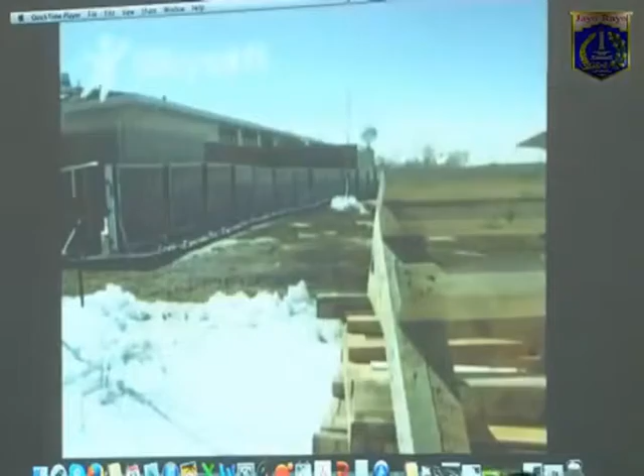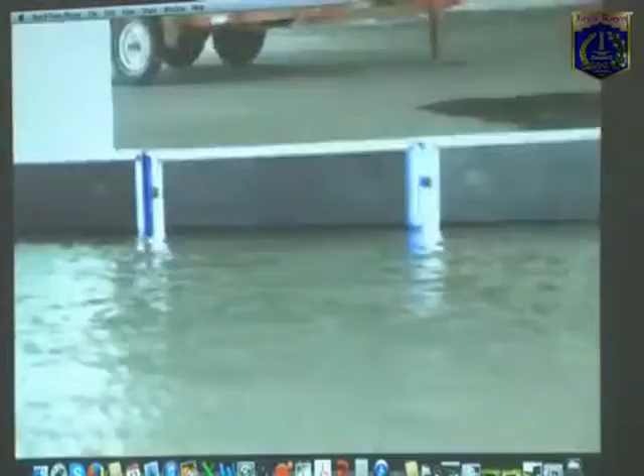These are not statements one would expect to hear during a flood, but they are how Aquafence clients describe their experiences with the use of the product. Meanwhile, Sanford Health is getting ready for the flood with the use of a new flood protection system. Crews are installing a flood protection wall called the Aquafence at Sanford Health's Reproductive Medicine Institute. We are very sure that all the contents within the department are going to be safe. Fargo, Cass County Electric, and Sanford Health have purchased 3,600 feet of Aquafence. Once the floodwaters recede, the wall can be taken down and stored for later use. Aquafence is made from plywood, aluminum, stainless steel, and canvas, and it uses water as a stabilizer. So as water rises against the wall, the system becomes stronger and less permeable.

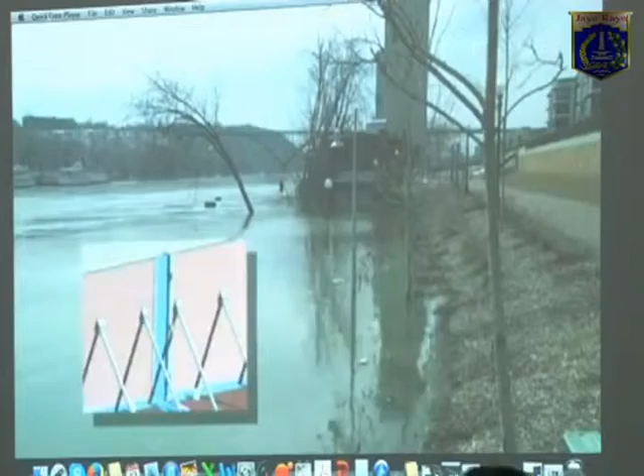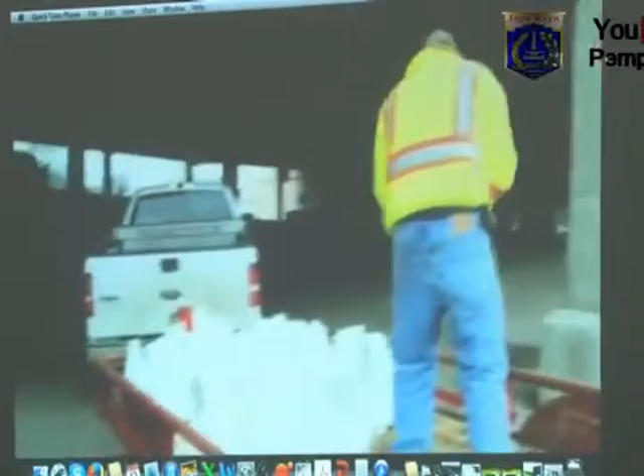When you are called upon to protect assets and lives, it is critical that you feel confident in the flood protection system you choose. You require a system that is effective and proven, and that instills in you peace of mind. Aquafence is just that type of flood protection system. Aquafence is the optimal alternative to sandbags and levees. It is mobile, reusable, and certified. It outperforms competitors regarding water seepage, and deploys 10 times faster than sandbags.

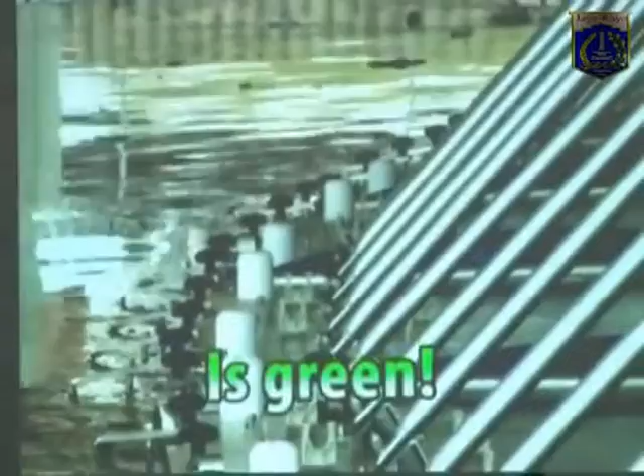Is a cost-effective investment with a long life cycle and high reliability. Ensures minimal disturbance to communities. Is green - it does not absorb toxic waste, has no environmental impact on the deployment site, and reduces CO2 emissions. Provides flexibility and is available in various heights. Is easily disassembled and stacked and stored in a warehouse. Can help keep insurance premiums low.

Aquafence is designed and produced in Norway and serves flood-threatened communities throughout the world. Founded in 1999, Aquafence now has international local representatives who are available to discuss your needs with you. For more information or to find your local representative, please visit www.aquafence.com. Aquafence - providing peace of mind through revolutionary flood protection.

First of all, Indonesia is one of the most severely affected countries for flooding, you know that. But surprisingly, there are many people in the rest of the world who believe flooding happens one time and then it doesn't happen again. We try to tell people flooding is not a one-time event - it happens again and again. And if you don't protect yourself, disasters will happen again.

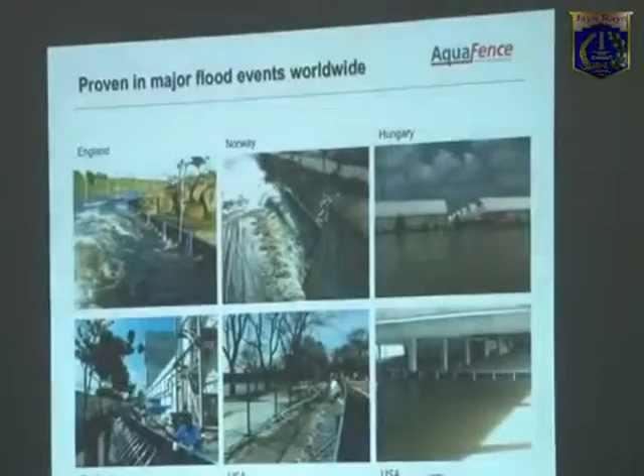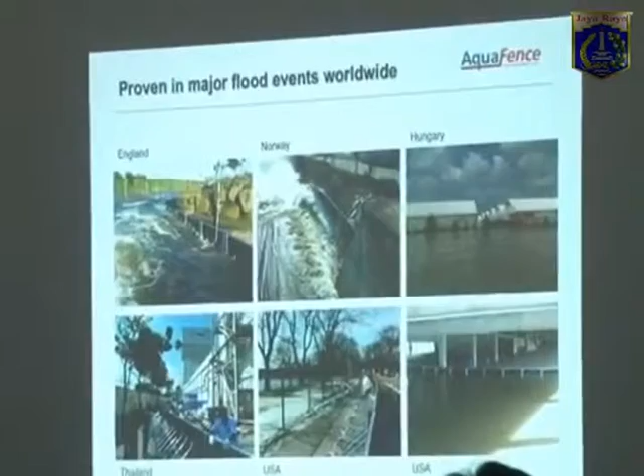Here you see different pictures of our products in use in Europe, in Norway, England, Hungary. In Thailand, we are protecting factories. In the USA, mainly protecting cities and small towns near rivers.

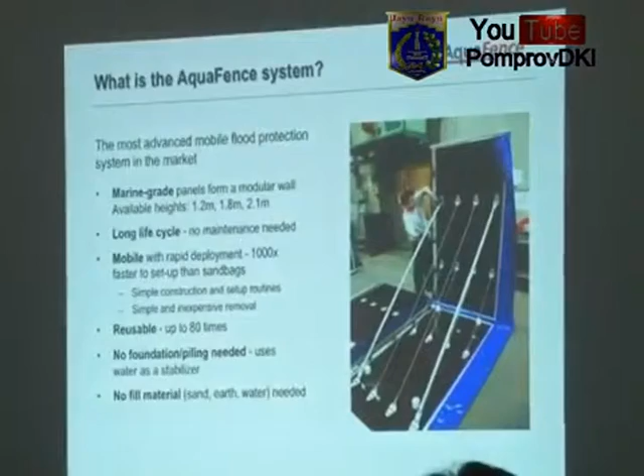So what is AquaFence? AquaFence is basically a mobile wall. This is what it looks like. This is the 124 model.

It is a mobile wall whereby you transport it closed, and then you just open it up like this. It takes around 2 minutes to open up. You take individual modules and create a barrier, so it's very flexible. We have different heights, up to 2.1 meters.

Basically, there's no maintenance needed. This product lasts around 10 to 15 years. It's very fast to deploy. You do not need any fill material like sand for sandbags, or any water. Most important, you do not need any ground preparation—you don't need to drill anything into the ground.

So you just put it onto the ground. But the ground has to be flat. Correct, it needs a flat, firm condition—it could be asphalt, concrete, compacted soil, anything firm.

So, how does AquaFence work? How can it protect against these strong forces of water? It uses a very simple engineering principle.

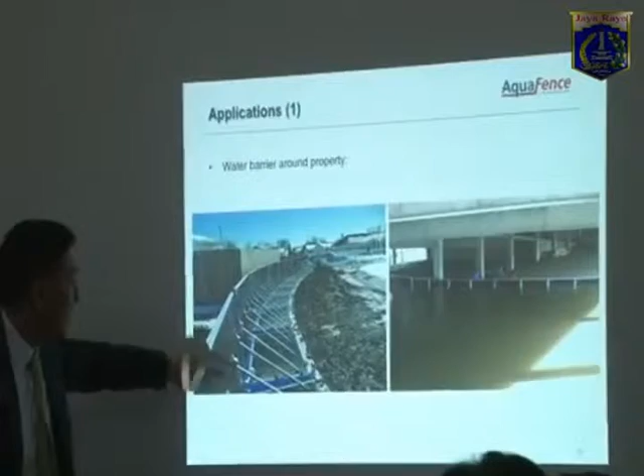We have different types of applications. One, we can create what we call a water barrier. Let's say you want to protect this property—you make a barrier around it. Or for example, here, this is a hospital, and here they make a barrier. That is the most typical application, to stop water from entering a property or an area.

So these are 4 typical applications that our product is used for. Now, the good thing about our product is it's very flexible. The same product can be used to protect a building, protect a city area, create a drainage canal, or protect roads, because it's a very modular and flexible product.

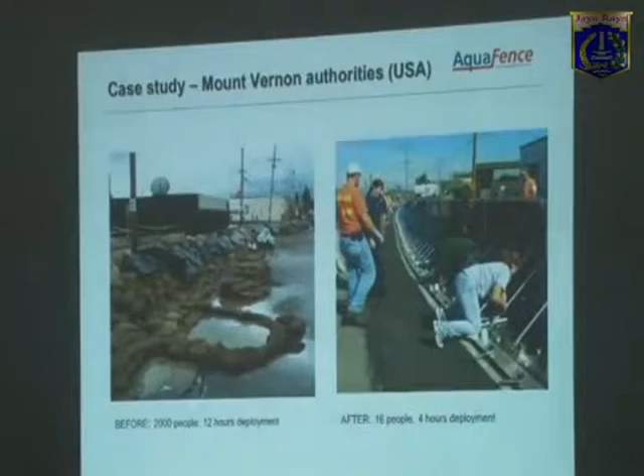An example of the speed: in the past, the city used to use 2,000 volunteers to make a sandbag wall, and afterwards it only takes 16 people for 4 hours.

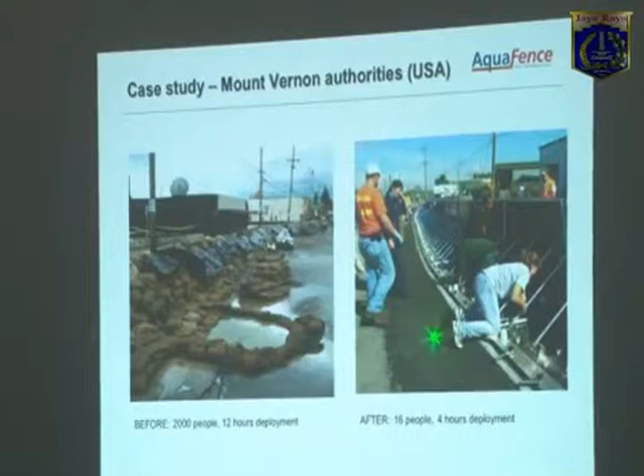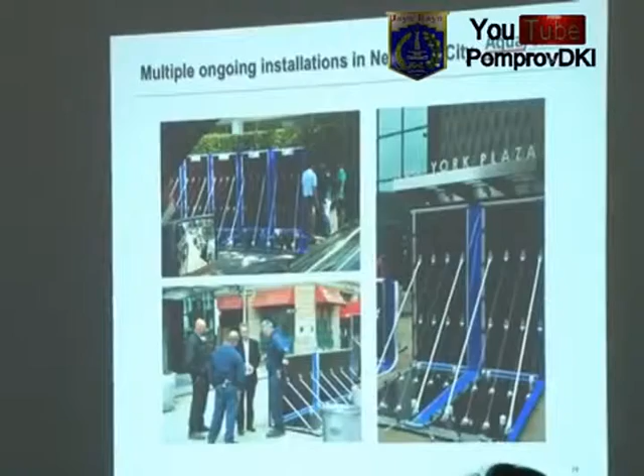At the moment, we are doing a lot of work in New York. New York was affected last year by the major storm, Hurricane Sandy, so now we are doing a lot of protection work in the city of New York.

We sell to 2 sectors. One is the private sector, where we protect factories and buildings. The main reason for factory owners is that if your factory gets flooded, it may take many months until it's up and running again. You lose revenue, you lose people, you lose market share. So for big factories, it's quite important to protect against flooding.

One of our largest customers in Thailand is Nestle, where they protect 4 of their factories with Aquafence.

Many people ask, flood protection is expensive, is it worthwhile? It's a similar question to asking yourself about fire protection or life insurance. If you don't need it, it seems expensive. You need it only once, and then it's cheap.

And if you can use it multiple times, it even lowers the cost of ownership.

Now last, I'd like to come to applications for governments. For government and public offices, what are typical risks?

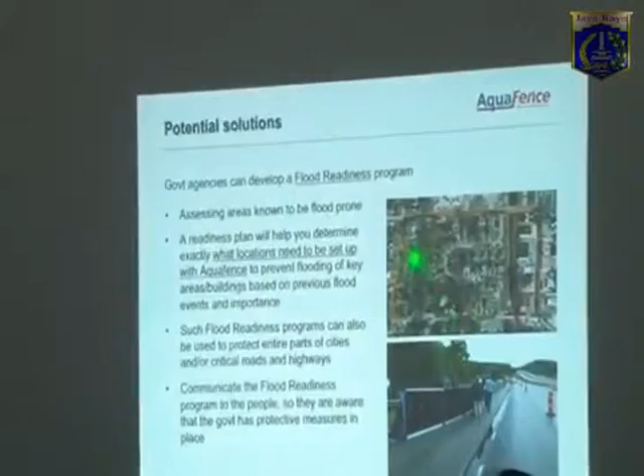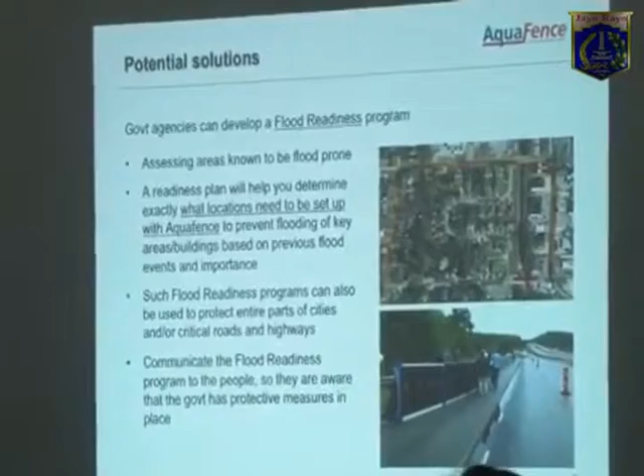What are potential solutions that we do in the rest of the world? What we do is what we call a flood readiness program, whereby cities or governments identify an area in their city which needs to be protected, and we create a wall around it. Once you know in advance which areas you want to protect, you can set up the wall, and within 1 day, basically that area is protected.

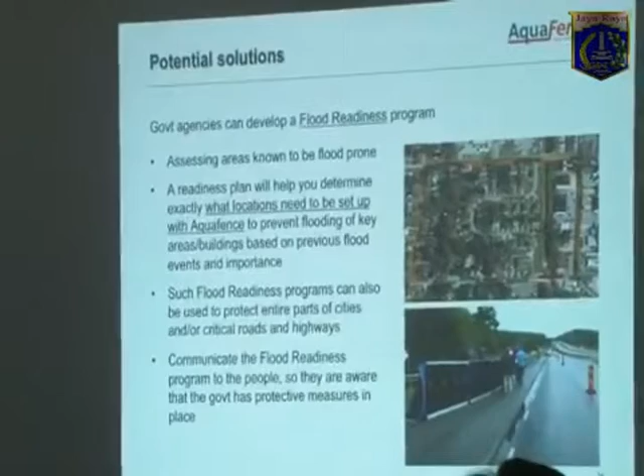Or for example, if you know there's a very important highway, we set up a wall here to protect the highway. Most important in flood protection is knowing in advance which areas you need to protect, and then you can prepare, because you can never predict where the water is coming.

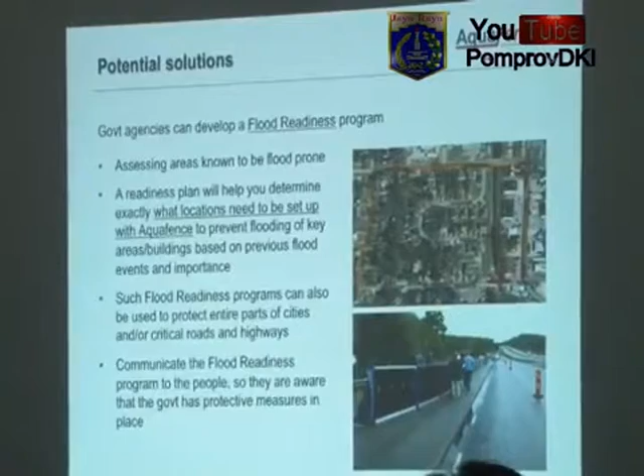And here, this is my last slide. Basically, we are here to offer our experience and our services to the government of Indonesia. We can help; we are typically in the water, we help setting up installations during the actual flooding time, so we are not just sitting in an office. We do a number of things.

Besides equipment sales, equipment rental, leasing, financing, we also do deployment services whereby we can even keep the equipment, and then you tell us, for example, which areas you need to protect. We come up with a plan, and then we do everything for you. We deploy the equipment, and then when the flood threat is over, we take it back. And then, instead of buying the equipment, we charge, let's say, an annual service fee. So we have many different options to help our customers and governments throughout the world.

This was my short presentation. I wanted to give you a quick overview about our product. I'm not sure if you get it.

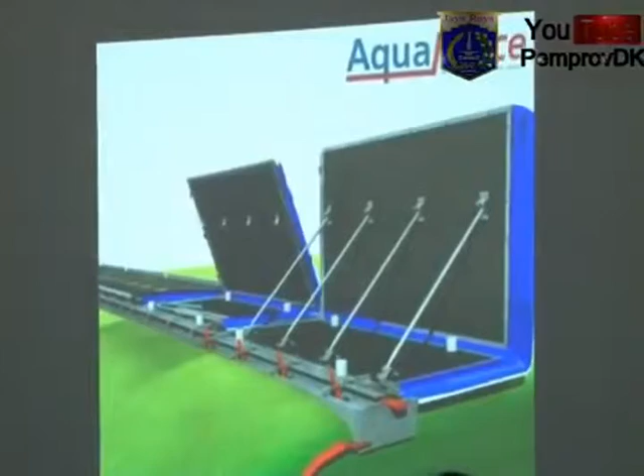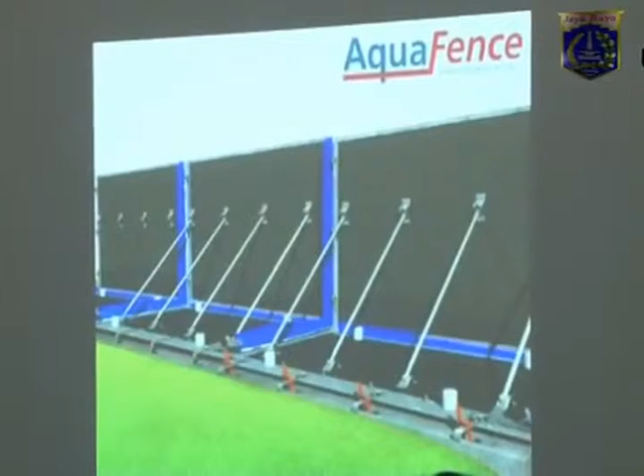Connection antara panel ini? How to connect? Yes. Every panel. Yes. You see now 4 elements, and basically you open it up like this here. And then you just put up these aluminium struts. And then what you see here, let me just stop the video. What you see here in blue is what we call a canvas. So this is what is here white. It's a marine grade canvas.

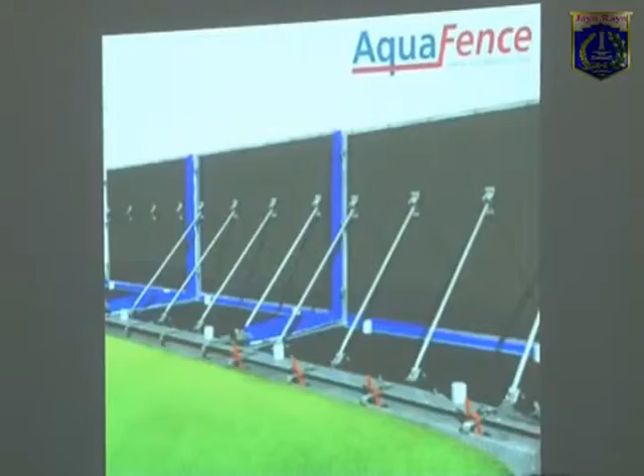And what you do is you connect the canvas from one element onto the other side of the other element. So on each element, on one side you have the canvas, and on the other side you have here a clamp. So basically this one goes underneath the clamp and you tighten it. That's all. You do not need any tools, and this can be done by unskilled labor. You don't need to train your people. It's basically just lifting and connecting.

This canvas is water resistant? Yes. It's not a geomembrane? No, textiles. It is what we call a marine grade canvas, similar to what you use in sailing ships. So very, very durable material, which is waterproof and cannot break. So here you can see a video how it's... And this membrane is replaceable? All the items are replaceable, yes, but we have never encountered where you have to replace the material unless it's physical damage. Let's say something not assembled.

Well, this, how many meters? The highest we have is 2.1 meter. 2.1? Yes. Because it's a modular system, basically you attach as many modules as you want to make a wall. So for example, if you need 100 meters, maybe you need 80 elements. If you need 20 meters, you need less elements.

Usually this protection is temporary protection? Yes. So basically, the advantage of this is it's temporary. That means if you know the flood is coming, maybe a few days before that, you bring the elements, you open it up, and then you protect it, and the moment the flood threat is gone, you can take it away. Typically, this can be assembled within half a day or 1 day, and removed within 1 day. That means when there's no flood threat, you have no permanent structure to obstruct your view or obstruct your facility or your area. It's a pure temporary solution, a mobile solution.

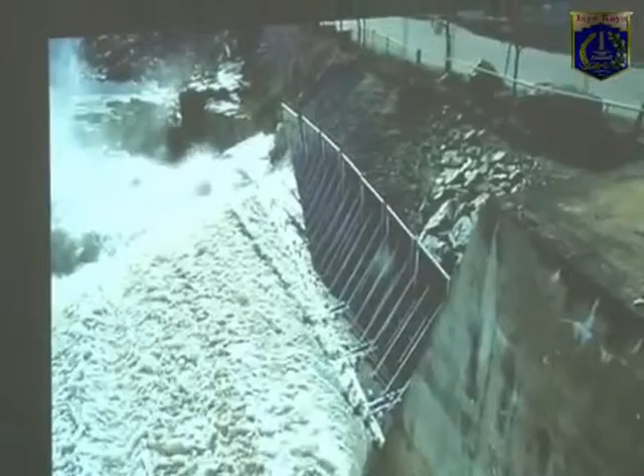And also, when you say that, you know, if the water is very fast, can AquaFence protect? We have here a very interesting sequence. This is a dam in Norway where they have water flowing out with 60 kilometers per hour. And what happens is it erodes the riverbank. And so they're using our system to protect.